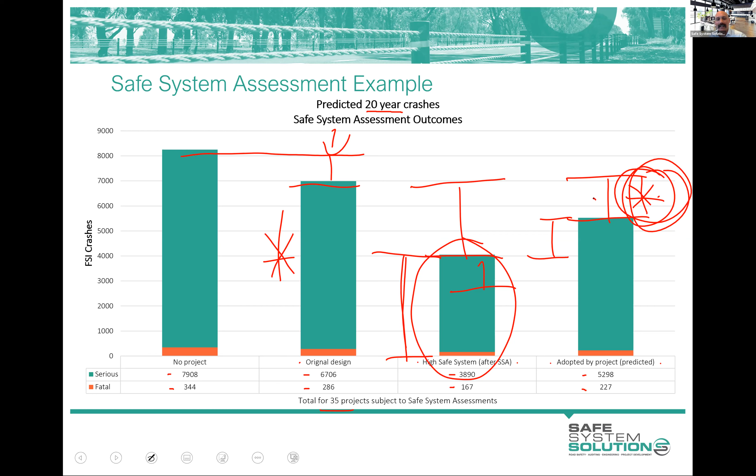So here's just a few of the benefits of a safe system assessment. I took this straight out of a Victorian government guideline document. Great way to determine how well a project aligns with safe system principles. That one is so good because when I was working at VicRoads, I was manager of planning in one of the regions after spending a long time in the road safety department doing lots of road safety projects and the like.

But I was just amazed by these questions of, is that safe system or is that not? Like, no, we can't do that, it's not safe system. And then the debate that would happen. Yes, it is. It's not. People had genuine views that this was or was not safe system. And we talked about that being a ridiculous question and debate in that binary sense.

They should have been saying, well, how well does this align with safe system principles? And they might have actually had more agreement. They said, well, it's pretty good, but it's not as good as it could be. And they both go, yeah, that I agree. All right, what can we do about it? And how can we make it a bit better? But

so the idea that we can have some sort of consistent methodology that gives us some sort of results that people can look at and say, well, this is where we're at and this is what else we can do. I think that's pretty amazing, to take a philosophy and put it into a tool like this. So that's a real advantage. Great way to compare projects.

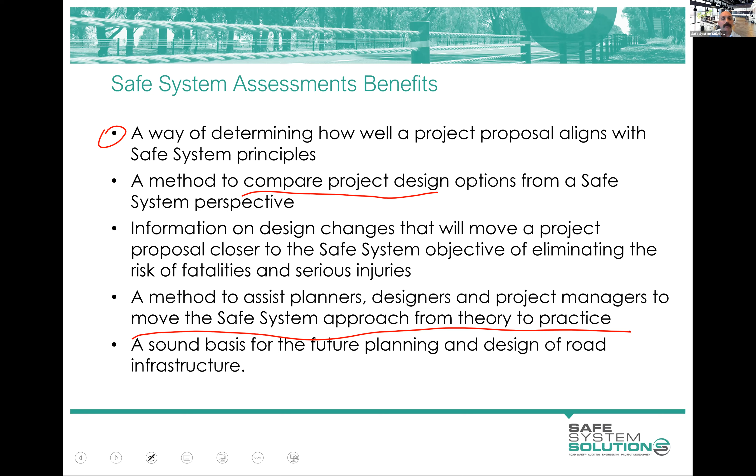So let's go through some process guidance. We'll cover off a few things here. The first thing I reinforce, and I've said it before, but if this is your sort of project life cycle, which is from the concept, draft, develop the details of the project, develop the design and all of that, constructed, and then it's open to traffic, and traffic being cyclists, pedestrians, motorcyclists, and vehicles. Don't think of it as just cars.

You see there that there's a lot of push at that safe system assessment at these early stages, and then road safety audits sort of complementing and also should be referring back to this safe system assessment to check that we're still keeping those important elements. I think I mentioned earlier that if you're asked to do a safe system assessment at this stage, it's eroded a lot of the value of it, because fundamental changes in the scope are not being entertained when they are that far down the track of the development of the project.

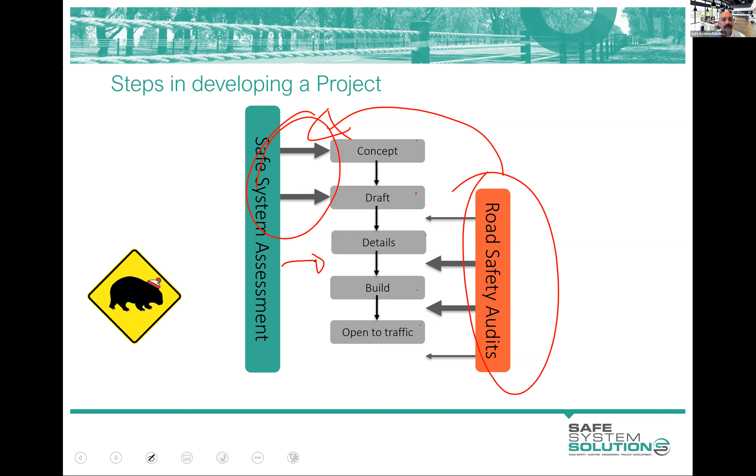The differences, so I'm currently working on an update to the Austroads Guide to Road Safety Part 6, which is road safety audit, to integrate a lot more safe system thinking into it. And so a lot of these gaps or differences are actually going to close up. And that's good. We're still very much going to be acknowledging the importance of safe system assessments at that early stage. But what we're doing is trying to drag road safety auditing into a bit more safe system thinking.

Not to say there wasn't a lot of good stuff in road safety audits for the last 25 years. Amazing stuff, actually. It's just that extra emphasis on severity of crashes and a little bit broader thinking in a few areas. Anyway, there's a comparative there, but the big ones really are severity of crashes. Safe system assessments just force you into that, as you're seeing when you're doing the matrix. Exposure, a lot more emphasis on exposure in a safe system assessment.

And that real focus on fatal and serious in a safe system assessment, and less concern about property damage, minor incidents, which road safety audits tend to pick up a lot of, unless you're in Western Australia, which is very different in road safety auditing, but that's another topic for another time. Also, post-crash care, maintenance, people aspects, so more a system view rather than just the pouring of concrete and putting up a barrier and the like.

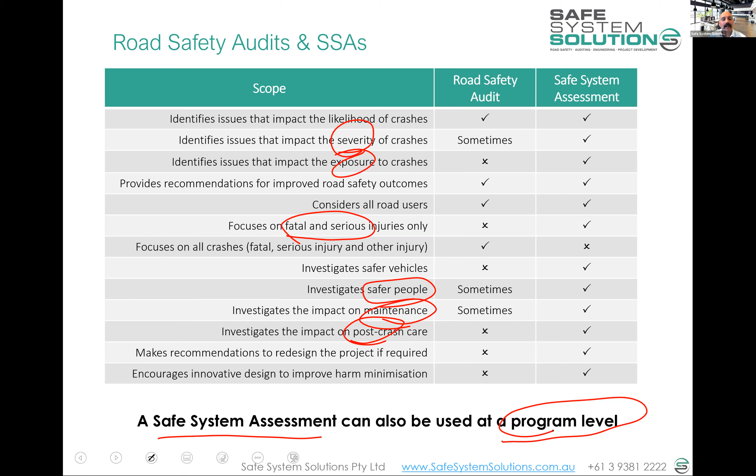And the versatility of a safe system assessment, I think, should never go overlooked. I mean, a whole program. You can do a whole public transport program. You could do a whole road safety program, active transport program. The whole program could be put through this method to see if there's enough focus on some different areas. That's the versatility of the tool.

So when you're asked to do a safe system assessment or get involved in one, this is the way that usually plays out. So we've got, I'll call it the client. So a road authority or the like, they determine whether they want one of two types of safe system assessment. Now, I'm using some Victorian terminology here, full or rapid. There's some jurisdictions popping up with their own terms. New South Wales is using full and rapid as well. Queensland uses light, I think, instead of rapid.

A safe system assessment light, and I'm having a mental blank as to what South Australia has done. I think they've just used rapid as well. But anyway, basically, as the names say, one's a bigger exercise, but they're not completely poles apart. Still a rapid or a light has, I would say, 75% of the work of a full anyway. So it's not like we're majorly different here, but somebody needs to make that choice, full or rapid. And I will tell you shortly what the difference is in terms of the scope of the task.

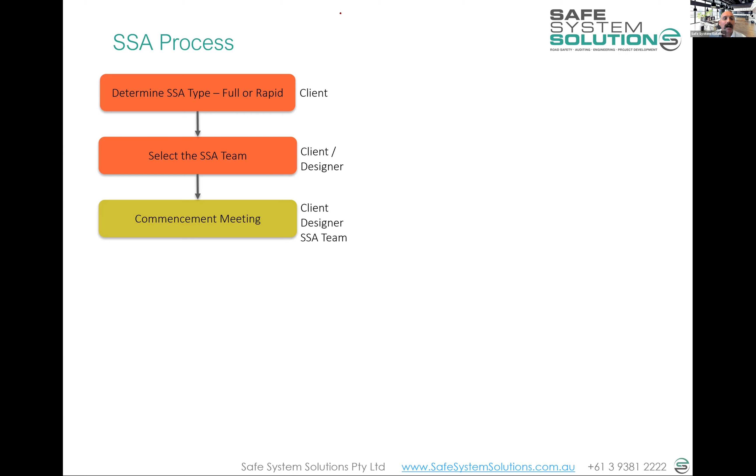And then the team is selected, whether it's to go to a consultancy or go to another area within the department or the like. And then you have some sort of commencement meeting, some sort of discussion about the project, where you get everybody in the room or on Zoom or the like. And this is where you really get into understanding the context of the project, the scope, what's happening, why things are happening, and really getting clear in your mind as safe system assessors what you're actually assessing. So that's important.

Then you get out there and inspect the site. And then you complete the matrix, which we went through last week. You consider these other elements of the safe system, the safer people, the vehicles, the speeds you've probably got in the assessment matrix, the post-crash care, any maintenance implications and these sorts of things. You sort of factor all of these wider elements in.

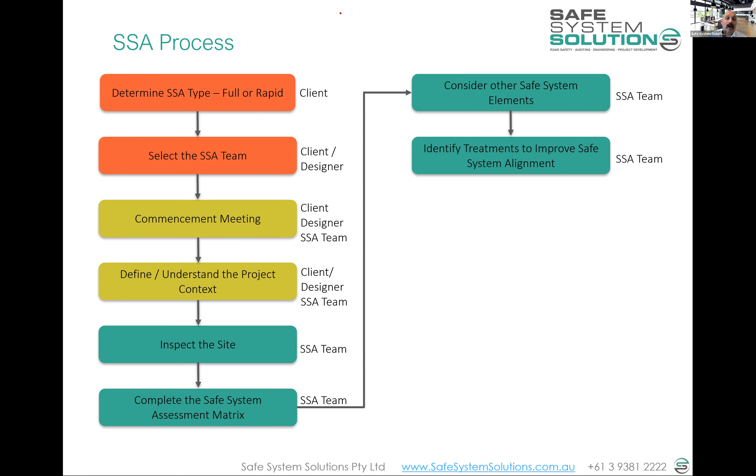And then you identify treatment options, recommendations, considerations. We actually call them things to consider. Ideas for consideration, I think, is the actual term most jurisdictions use. They're a little reluctant to call them recommendations as such. Just the legal scaredness, I suppose, for lack of a better term, that they don't want an official report from experts that says you should do this, and then they don't do it for one reason or another, and then will they be held legally liable down the track for not doing it? So they're being termed ideas for consideration as a very friendly way of recommending stuff.

And then you write up your report, and there's a specific format to that report again, which we went through. But you're in a wonderful position now that the jurisdictions are basically providing templates, so you know what should be in the report, and everybody's doing the same thing, which is good. And then it's back to the client really to make responses to any ideas, suggested changes, and whether or not they report that back to the Safe System Assessment team is up to them. And then they amend the design of the project to incorporate those changes.

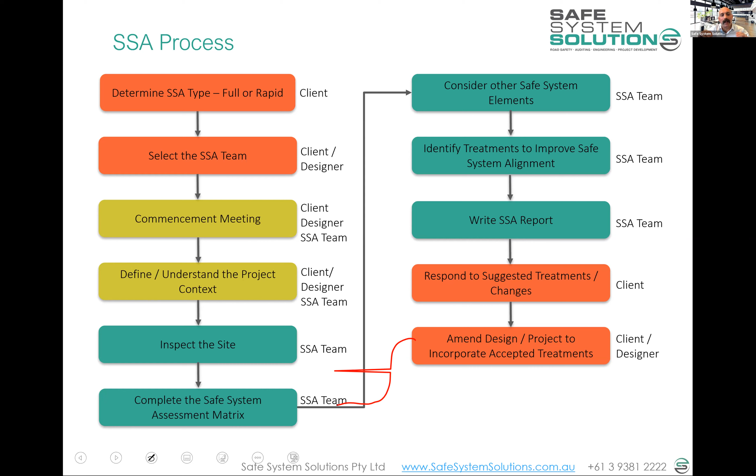Sometimes at this point, they actually go back to you down to here and ask you to rescore what they've decided to actually change and do, so they can get that continual proof that they're getting better and better alignment with safe system principles. And then it just sort of feeds around again. So that's the process. And some of you are probably looking at that going, I'm pretty comfortable with that process because it looks very much the same as the process of a road safety audit. And that was very much intentional, to make that process the same as road safety auditing in terms of client commencement meeting, site inspection, assessment, and recommendations and changes.

If there is no intention here, like, okay, we're not going to make any changes to this design, but we've got to tick this box that says we'll do a safe system assessment, don't bother. Why would we waste resources if there's no intention to improve things? If you've got options on the table and you want to choose the one that has best alignment with safe system principles, yeah, sure, that's a good time to do it, even if you've got no intention to make changes to any of the options once selected. But we do hope that people have a genuine desire to get better alignment with safe system principles. As soon as anything like this goes to a tick box exercise, just don't bother.

Okay, Kathy. A lot of questions, Ken. A lot of questions. You ready?

Yeah. Is there a benefit of completing it at a network level when updating transport policy and network plans, so that we stop trying to put all modes on all corridors and make it more explicit when determining the movement and place category for a street?

Gee, that's a complicated question. I think it could significantly have some advantages, give a clear framework to operate under in sort of showing some of these benefits or challenges that exist. I think it would be a complex exercise and it'd need a lot of thinking about how you're going to do it. But what I'd suggest is play around with the safe system assessment framework a little bit on a small sort of pilot area in that thinking before you go full scale into it. But happy to chat about that sort of stuff with anybody if they want.

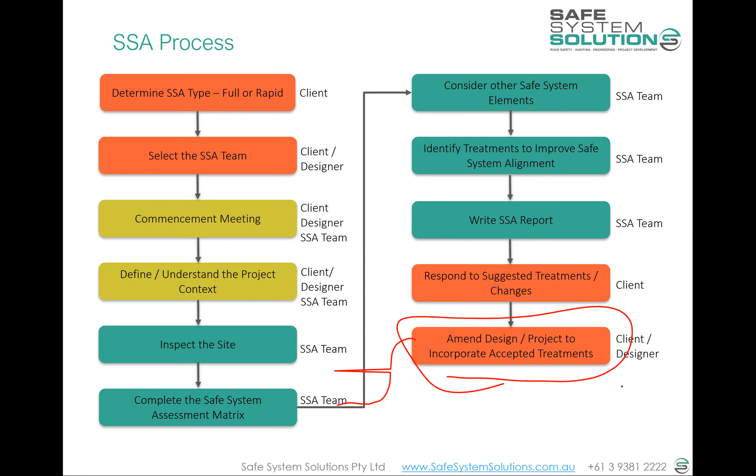Is there a list of accredited safe system assessors, like with road safety auditors, in Victoria or around the country? What a great question. Are you about to lead into that? Yes. I was about to say I'm going to move on to lists of different accredited safe system assessors or the like. So well done, Jessica. There's a nice little segue. But I will come back to more questions after I run through a bit of that.

So there are a number of jurisdictions that are starting to put out registers, lists of safe system assessors. Victoria has one on the VicRoads website in the safe system engineering area. And they have a number of great resources on here. They've got the Austroads framework, the Victorian guidelines, the Victorian template that you're using. And then a bit further down, there's the actual list. But let me cover off a couple of things here.

So the list that they had is the list of recommended safe system assessors. This is what they've called it. They're not calling it an accreditation list or a pre-qualified list in Victoria. It's just recommended safe system assessors. So what you need to do is express some interest in this to the safe system engineering team, and then come to some sort of training. Our training is the one that's listed here, or equivalent, but ours has been the only one running. So everybody's been doing this one. Then you need to actually get some experience doing safe system assessment. You need to go out and do a proper one.

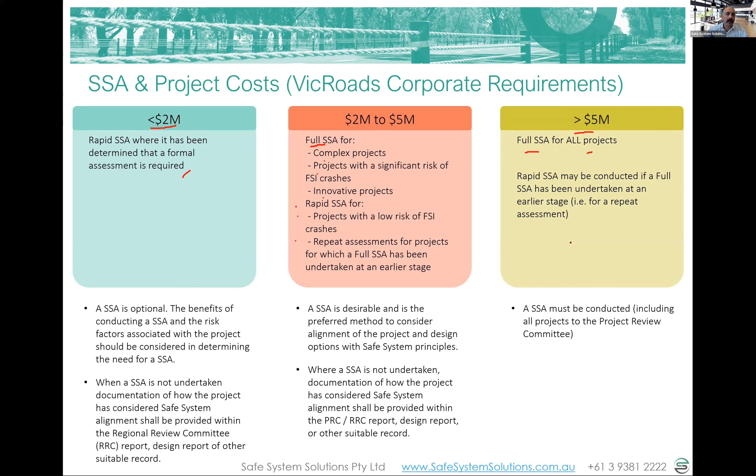So a few clarifying dot points under there. I'll let you read in your own time, but I will just cover off what the differences are between the full and rapid safe system assessment in Victoria. And then I'll just touch on what some other jurisdictions are doing, because I haven't mentioned New South Wales, New Zealand, Tassie, Territory, Western Australia, and the like, and I'll just cover those off very briefly.

So the difference between the full and the rapid is really, you can see the dot points there, but the site inspection becomes optional, and the consideration of other safe system pillars or elements. So it really comes down to producing those matrices and scoring them and coming up with recommendations. A little less reporting requirements than a full safe system. So again, get the template, and yeah, they're the main differences.

So let me just run through some of those other jurisdictions. So New South Wales is actively doing safe system assessments, and there's a pool of people in New South Wales that have been trained up to do safe system assessments. We've done some training up there, and got enough consultants up and running to be able to service a little bit of the demand. So the major projects coming out are now being more and more encouraged to do safe system assessments, and they're doing that.

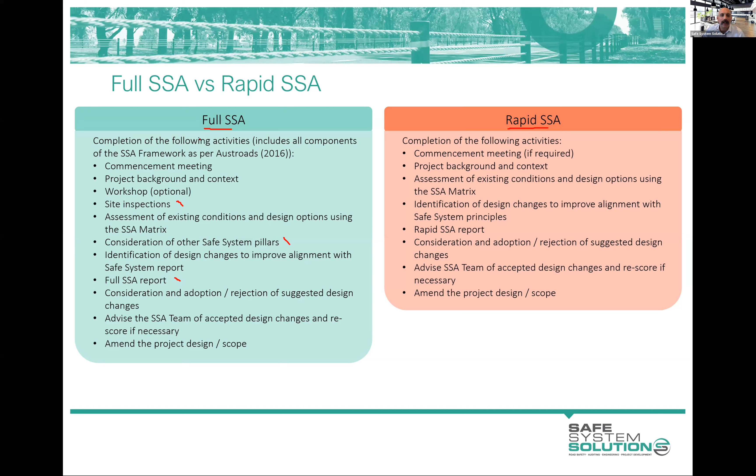Safe system road environments. Okay, just the last few slides. Just as I mentioned, we're going to go through residential environments, shopping strips, mixed-use arterials, low-volume rural roads, high-volume rural roads, high-volume outer suburban arterials, urban freeways, and rural highways.

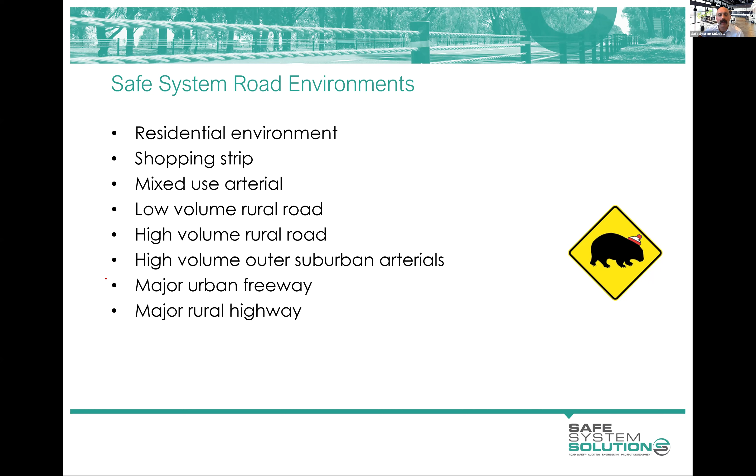This is where we do want to start to see the continuous barrier systems, central barrier system, outer barrier systems, and we're pushing to reduce the severity of the crash. And we can keep high speeds because we know the severity outcomes are going to be really good for passenger vehicles, and they're the predominant run-off road and head-on crash risk. And then when you hit intersections, again, we're going to slow vehicles through these conflict points and these high-risk areas. The really nice, clean, clear example, and it's symbolizing the whole thing, is a roundabout.

And then you've got your central barrier system, obviously, that continues on through there. And so all your access points from along here come in, and they turn around that if they want to go the other way. You've got a slow point, beautiful U-turn, everything's nice. I'm sure some of you have been involved in these projects; I can paint a nice, easy, logical picture. The practical realities of it are challenging. How far do you make them go before they turn around? We can't afford different roundabouts in these areas. Yeah, this one's set up for a roundabout though, isn't it? Look at the property boundary. Anyway.

Thinking about the intersection, both the likelihood and severities are an important one. Lots of likelihood factors we can do in the interim. The side road activated speed limits, so having a speed limit on the main road and detectors up this road. So as a vehicle comes in, reduce the speed limit on the main road. So trying to reduce the severity and likelihood of crashes by targeting the bullet vehicle. We've spent all our time in road safety targeting the target vehicle, haven't we?

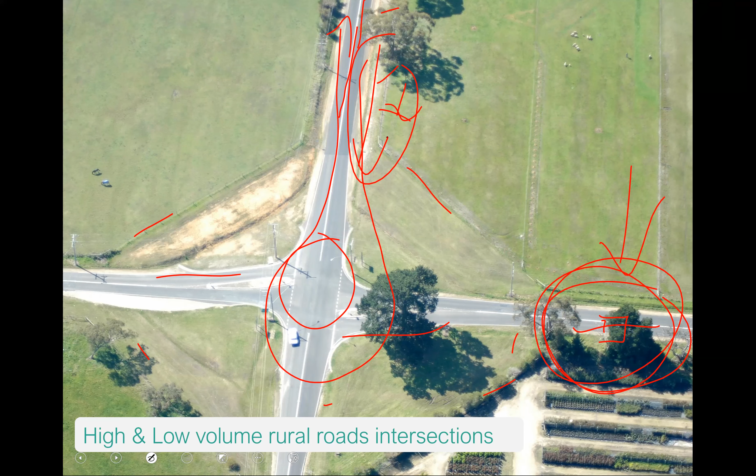Well done. And just in your previous example, wouldn't barriers in that scenario increase likelihood of crashes for broken down vehicles or people stopping on the roadside? Yeah. Yes. It will increase that a little bit, but the decreases you have for the others just swamp that. Now, but I won't. So I shouldn't.

So the thing is that there is an example of risk perception, because I can calmly say that the risk of broken down vehicles being struck, anything like that, is minuscule compared to the risk of run off road into trees, power poles, culverts, rolling over. It's a completely different risk, and we're so much better as a society by rolling out that continuous barrier system. But that outrage factor that we talked about, it cannot be ignored.

And the public go berserk when we do these long runs of barriers, a close offset to edge line, and provide no space for them to get off the road. So if they were to break down, they feel vulnerable, and vulnerability is a big risk perception factor, and they will go absolutely feral, as we've seen quite a few times.

Sorry, just thinking about that, is it because if somebody runs off the road, let's say they fell asleep or something along those lines, we can blame them as opposed to the person who's broken down? Okay. But it's quite complicated in risk perception, because there's about three risk perception factors at play in that one: control, vulnerability, and anyway. So it's fascinating, but the thing is, and I've made this mistake many times, is to ignore that outrage factor.

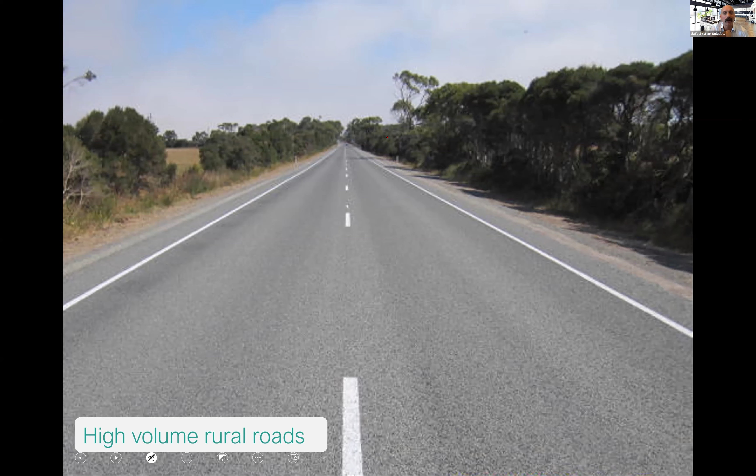yes, effective on the approach to an intersection to alert drivers to the presence of an intersection, reduce the likelihood of crashes. Yeah, I did a study on approaches to level crossings using rumble strips across the pavement, and they showed to be effective in increasing alertness and reducing speeds through the level crossing. So they are effective in the likelihood, because remember, the bullet vehicle is going to be the one that dictates the severity. So unless you're doing something on the bullet vehicle side, we're just really trying to deal with that overshoot crash.